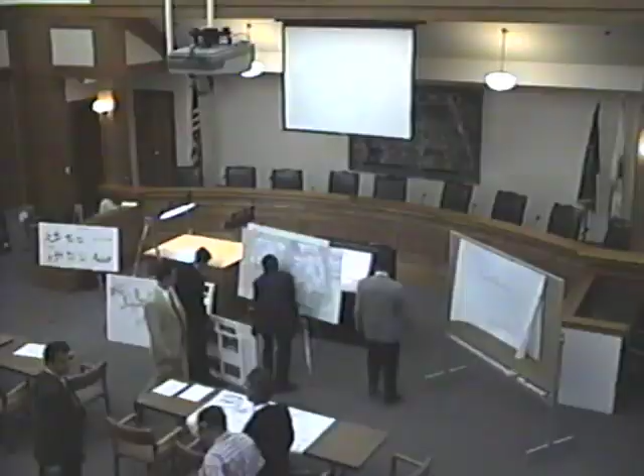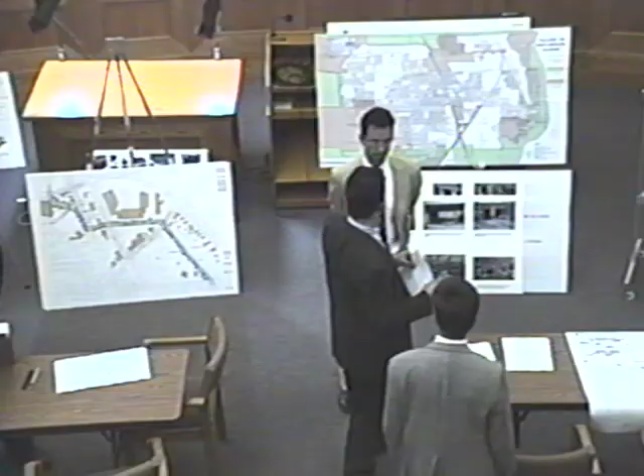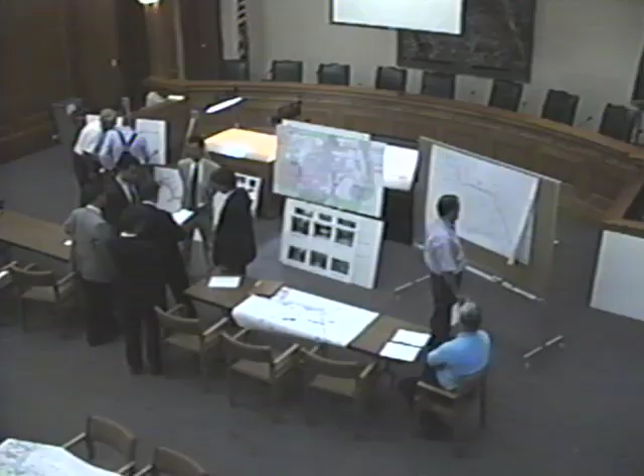Yeah, just send it in anywhere you'd like.

Hi, I'm Jim Reynolds, Director of Public Works. I'm the staff liaison to the Riverwalk Subcommittee, which is a subcommittee of the Central Business Area Task Force. This is our first formal get-together tonight. We've had three Riverwalk meetings that were kind of informal, as they were walkthroughs during the summer to get people acquainted with the potential route of this potential project.

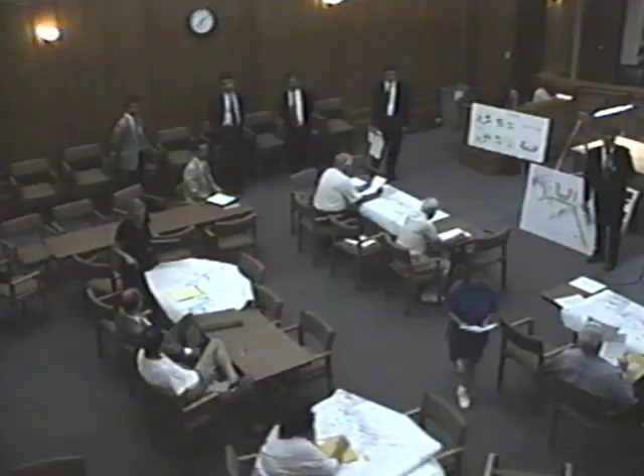So as Jim indicated, we're here in force tonight. And we really want to use this as an interactive process to get your input to the design process. At this point in the study, we're about one third of the way through the overall feasibility study process. This initial schematic design phase is meant to be a preliminary but comprehensive look at the Riverwalk project.

As you'll see in a few moments, we're going to present to you 3 basic concept levels. The minimal level will not have a Riverwalk. It will address primarily the issues of the river itself, being stream bank erosion and channel improvements that are needed regardless of whether any type of Riverwalk project goes forward. And Tony Wolf will address those issues.

Moving up in concept and cost, we will present a minimalist Riverwalk scheme. It will include the basic river improvements but will then add on a basic Riverwalk, and Scott Freres from the Lakota Group will present that information. And then also for your consideration, we have a sort of a maximal scheme, and this is the one that's going to be the most architecturally significant, and will be the most costly of the schemes, but we wanted to get feedback on people's thoughts on that approach as well.

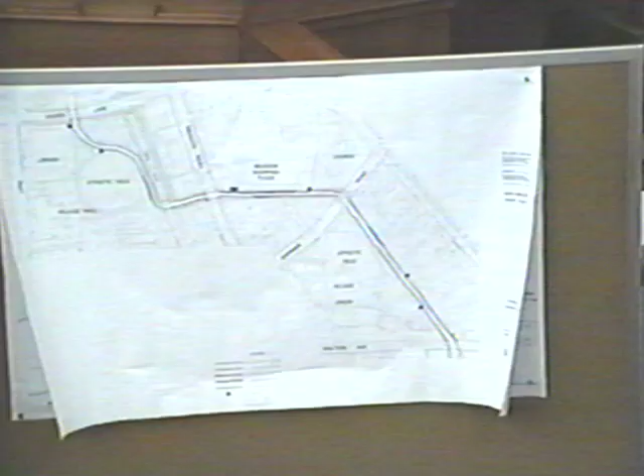Over here is a map showing different heights of erosion, as well as outfall structures, storm sewer outfall structures that are in need of repair. Scott is handing out smaller versions of this map. The difference in erosion heights is important because when we go into developing treatment plans for the shorelines, there are several different methods of treatment that can be used depending on the severity of the erosion and the overall condition.

So what we've done here is tried to color code the severity of the erosion. You can see starting up at the top, if everybody's got their drawings, at the north by Cherry Lane, the erosion up there is not so bad. We've broken it down into 3-foot segments. What we're saying up here is that there's about 0 to 3 feet of erosion depth up there. In reality, there's nothing really less than about 2 feet. This entire stretch of river is fairly eroded.

And as we move down, it gets worse and worse. This blue section is about 4 to 6 feet, and these red sections represent about 7 to 9 feet of erosion. So there's some pretty high levels. If you actually stood down in the bed of the river there, you'd be looking up at how far these banks have eroded.

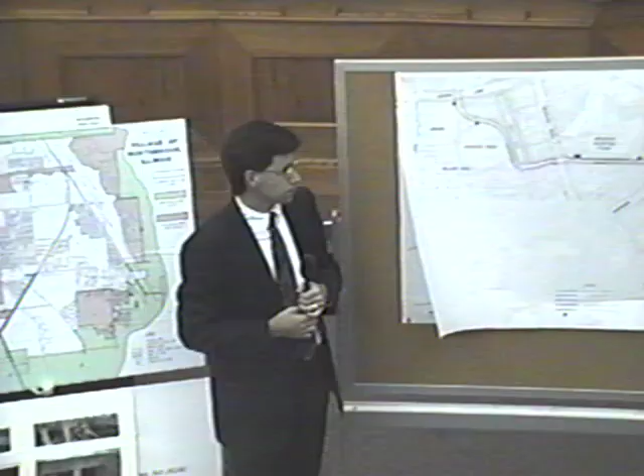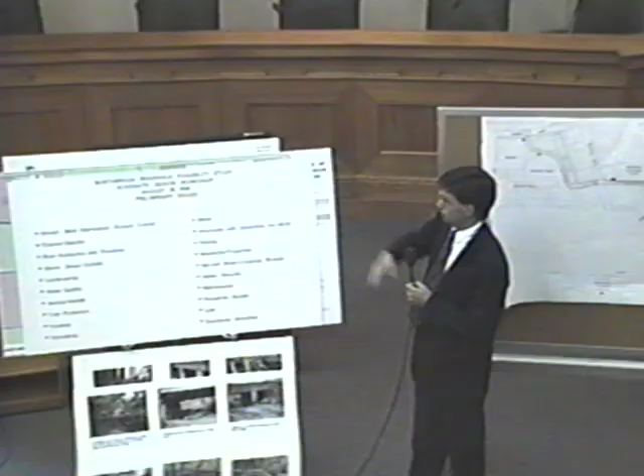There are several issues, of course, besides erosion that we're looking at. We've got this board here I can throw up, and I hope that it will include most of the issues that anyone in this room would be concerned with as far as this project is concerned. You can see we've got stream bank stabilization and erosion control as the #1 issue, because regardless of whether there's a Riverwalk built, we're hoping that something can be done about this. Rather than go through each of these items one by one, I think you'll see that as we move along through the presentation, we'll be touching on each of these items.

And then when we break into our groups, this will be kind of a checklist to see if each of you are satisfied with, or what ideas you may have, on each of these topics.

We have some photos here also to show the conditions that I'm talking about as far as erosion and sediment buildup and debris buildup. I'm not sure if you'll be able to see the captions here, but a few of these pictures are pretty graphic, as far as tree roots just coming out, sticking out of the ground where the soil has been washed away. And of course, these trees are not going to last too much longer that way.

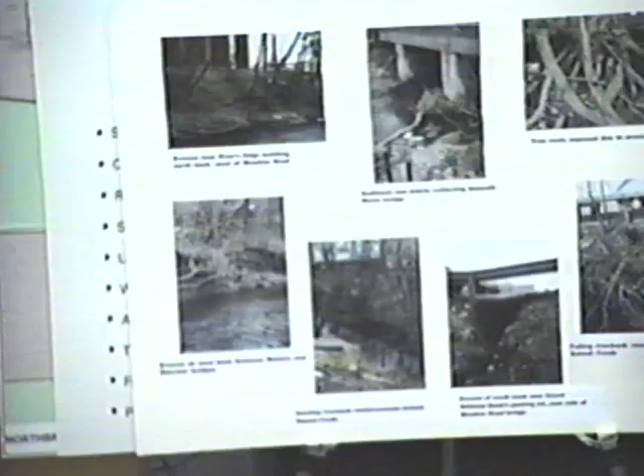There have been some efforts in the past to start controlling this erosion by some wood sheet piling. There's several instances of this failing already, so that needs to be looked at. There's a couple of pretty severe cases of erosion along the parking lots near the bank by Meadow Road, and also behind that Little Louise and that area there.

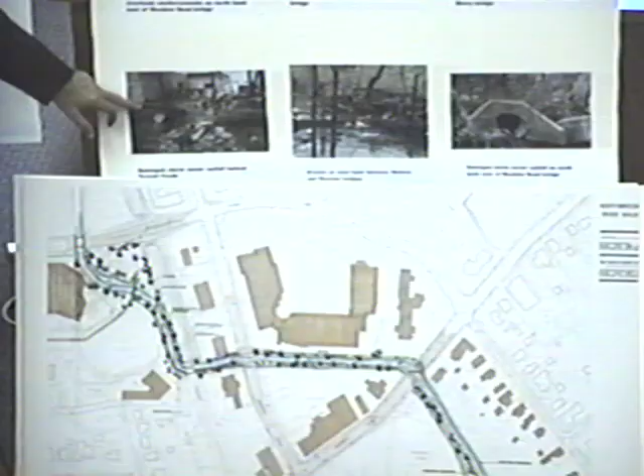Here we've got a couple of pictures of some storm sewer outfalls that have deteriorated quite badly. You can see a couple of them here next to the failing stabilization measures, and another one. These are near the Meadow Road Bridge, and this one here is behind Sunset Foods. There are several of these. These are just a couple of them, but there are, I would say, 8 to 10 of these in this stretch of river that would need to be looked at, repaired, possibly replaced.

So we've got our erosion and our outfall repair. A couple of these pictures are showing sediment buildup underneath the Metra Bridge, or the Shermer Road Bridge.

What we would want to do there is go in and clear those areas out, more for channel stability than anything else. If we can stabilize the shape of the channel here and then go ahead with our shoreline protections, we'll be in much better shape. Also, if we do go ahead with the Riverwalk, most likely we would have to go under the Metra Bridge, which would mean we would definitely need to clear out those areas and get down to a level ground.

So that takes us to our issues board here, as far as river hydraulics and floodway, the main thing there is regarding permitting. We can't really do anything that's going to affect the hydraulics of the river or increase the flood level. So whatever actions we take, if it's going to affect any of that, we have to take some kind of counteraction to bring it back to the state it's in now, as far as the flood level and river hydraulics. The rest of these issues will be touched on as we move along. What I'd like to do next is move along to our actual treatment plan.

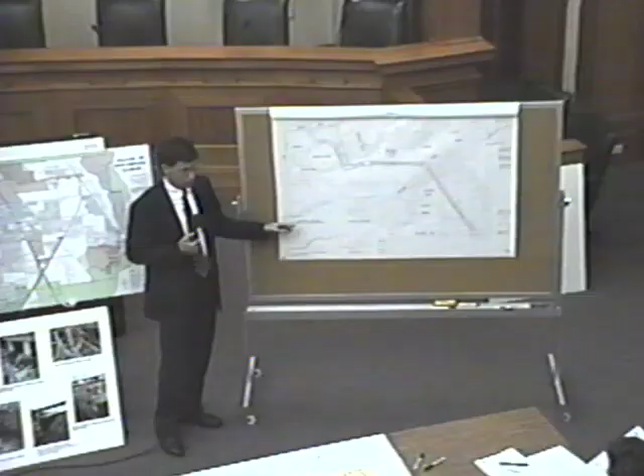So for this stretch up here that we said wasn't so bad, what we're considering is something called an herbaceous vegetation with dark stone and fiber roll treatment. This fiber roll is comprised of coconut fibers tightly wound into a log. This log can be anywhere from 6 to 12 feet long and about a foot in diameter. It's then laid right at about the normal water level, and you want it generally to be about two-thirds submerged in the water.

What will happen is as this becomes saturated with water, it becomes very heavy and acts as a support or a block to keep the ground from eroding away. Within that log are some plantings of either willow plantings or herbaceous plantings that will, over time, grow, and the roots will grow down into the ground. After about 5 to 7 years or so, this fiber roll itself will biodegrade away to nothing.

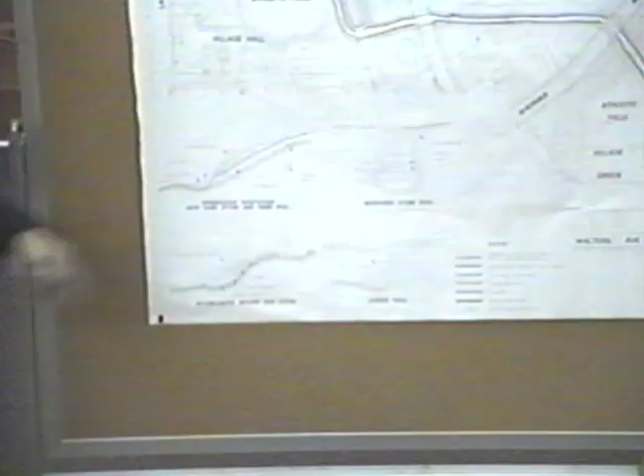But what you'll be left with is this vegetation that has taken hold and has tied up the soil, and you'll have this herbaceous vegetation also up the rest of the slope, some type of grass or ragweed or something like that. Down at the bottom, underneath the fiber roll, you just have some dark stones to keep the roll in place until it really takes hold.

We say dark stones just because we want this to be as less intrusive as possible. We don't want it to look like there's really been a ton of work done here. We want it to look as natural as it can be so that it's an appealing thing for people to see.

As we move down towards the Metra tracks, maybe some of you have seen there's a very steep slope on the side of the tracks with mostly dead vegetation in there. Most likely this is due to some chemicals that Metra uses to keep the vegetation off the tracks, and sometimes it will run down the hillside.

So what we've proposed here, where the erosion is a little bit worse and the slope is fairly steep, is something called interplanted boulder and stone. It's a little more sturdy and secure than the herbaceous vegetation with fiber roll, and what it consists of are some large boulders down at the bottom with some plantings intermingled, where the roots will take hold and tie up the soil.

And then just a few stones above the boulders, and along here we would just try and replace the dead vegetation that's there with some new herbaceous grass and some nice looking vegetation to look at, if the Riverwalk is ever actually developed.

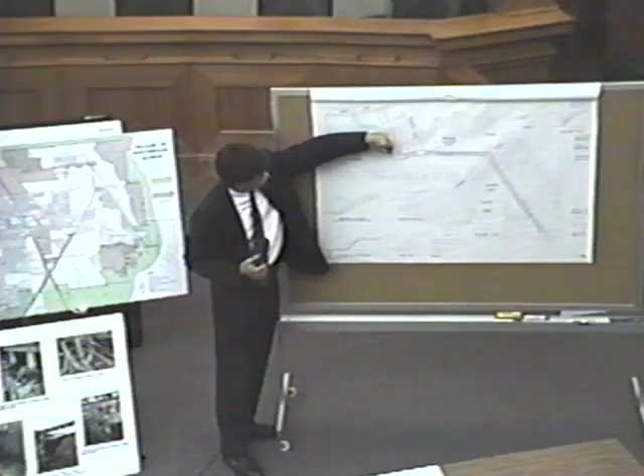So they're very sturdy. On the opposite side, what we're proposing here is a stone wall. The idea here is that if we do go ahead with the Riverwalk, it possibly would come under the Metra Bridge on this side, and then we would want some kind of a wall there to protect the walk from water, to keep it away as the people are going through.

And the stone wall is kind of a nicer thing for people to look at as they're walking, and also keeps the water away.

As we come under the Metra Bridge and move on to Meadow Road, again we're looking at the interplanted boulder and stone, and then in this next section after Meadow Road, we come to a little more severe erosion, where we have to start introducing some sheet piling.

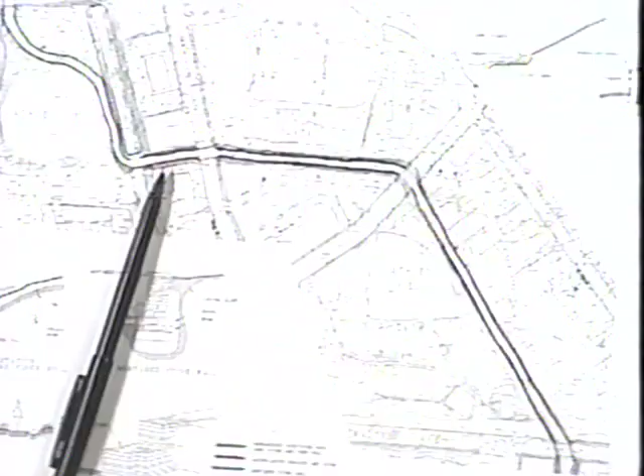Possibly, what we're looking at right now is something - it's a vinyl sheet piling, if possible. It's a little more attractive than steel sheet piling. You can get it in different colors. It's very strong still, and you can cover it with some different types of things to make it look fairly as natural as possible. That's the brown section here.

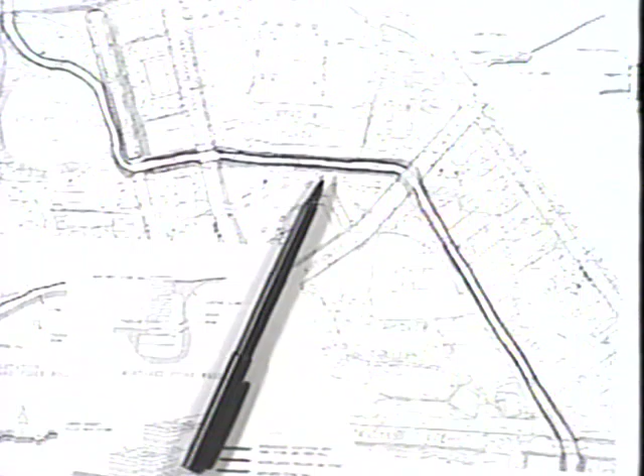The purple sections are just using cobblestones down at the foot of the bank - basically it serves the same purpose as the cobbles here with the fiber roll, but we're not introducing any vegetation here with the idea that, again, if we go ahead with a Riverwalk, this may be more of an urban type development with the shopping plaza here and the shopping area over here.

Scott, when he talks about his Riverwalk developments, will go through the possible different themes - maybe a natural theme here, an urban theme here, and a natural theme there. Any questions here?

At the end, once we get into the recap.

Okay, so we've got the cobbles and the sheet piling here. And over here, again, we go back to the interplanted boulder and stone as much as possible. That's kind of the strongest vegetative treatment that we can think of to use. So we want to use that as much as possible and avoid the sheet piling and avoid the stone walls and the gabion walls. So that's what we're using all along here, along the backyards of the residences.

On this side, however, the erosion is quite severe, and we've gone with the sheet piling with the idea, too, that the Riverwalk would possibly be going along this side and could then just be right at the top of the sheet piling.

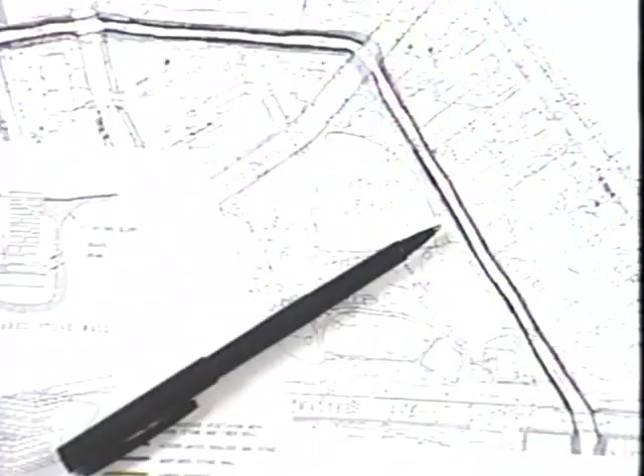So that's the idea for treatments, and I think at this point it's probably time to move on to Scott Ferris, who will tell you about the two Riverwalk alternatives.

Thanks, Tony. Before I get started with the alternatives, I want to quickly go through our analysis of how we really viewed the river. This is a little bit different than Tony's analysis.

Obviously, there's erosion control, and that's a major part of this process. But to get to the river walk part of this process, which is much more the aesthetic pedestrian environment as opposed to the functional resolve of erosion issues, we took a pass through this whole space and tried to define each of the areas or reaches of the river as to what its character was. That'll help us define, whether we go with a minimum scheme, maximum scheme, or no scheme at all, what kind of treatments or image each part of the river should have.

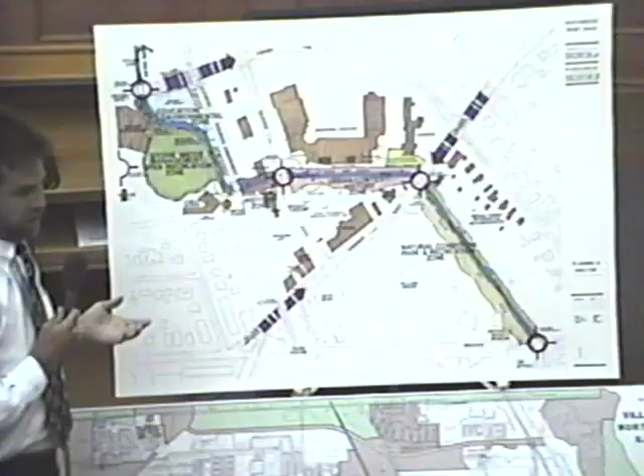Obviously, it's a linked river walk. It's going to all be connected. But as you go through different portions of this river, there's clearly a different feel to the river, and that should be accentuated rather than fought against in designing the river walk system.

First and most important, the river runs through this town, but nobody knows it when they're coming through, driving by, or walking by, because you can't see it. It's below you, you drive over it. The only reason you know there's a river there is because you go over a bridge, but even the bridges themselves are pretty heavy and hard, and you really don't notice the water below them. Very few have open railings that look down at the river.

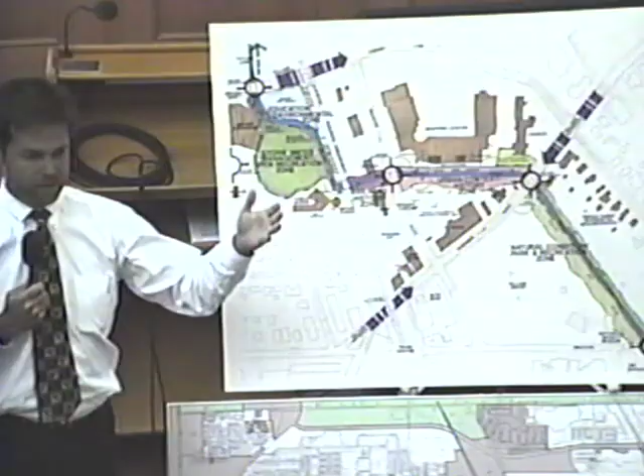One of the very first things we noticed was important, in terms of the overall length of this river walk, was establishing gateways - gateway opportunities, areas where you could get to the river, areas that are signed or identified to get down to the river, or merely elements like special lighting, special features, a plaque or a banner or whatever, that identifies: the river is here, this is where you get on the river walk, or this is just a place to look out over the river and overlook.

We've identified those up at what we call a village arterial, Cherry, that brings a lot of traffic into the downtown. Again, at the other village arterial, which we defined as Shermer Road, that brings everybody into downtown. A crossing or gateway opportunity along Meadow, a much lower density road - although there's a lot of traffic on it, its scale is probably bigger than what it needs to be for the amount of traffic actually moving through it.

And again, another gateway opportunity at the very southeasternmost end of the site, down by the doctor's office, St. Norbert's, and the museum. Another gateway opportunity at the end of the park. These are critical points - something should happen at these areas in one shape or another to identify the points to get to the river or to see the river.

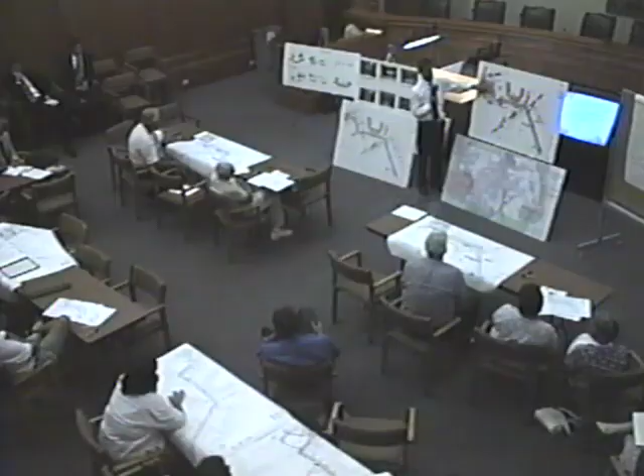Then walking through this space, we started up at the opportunity - assume that you get on this at the parking for the library. We have the new library expansion over here that really lends itself to establishing some sort of what we call the educational or environmental zone of the river. There's already some treatments planned as part of the library expansion, as part of the parking lot and the shoreline of those areas.

We saw that as an opportunity to identify maybe reading gardens. We saw this as more of a passive zone, much more naturalistic in whatever approach we take there, whether it's a river walk, stream bank erosion treatments as Tony talked about, or just the overall quality. This doesn't need to be a hard edge.

As you move further to the south, you're walking towards the public works facility, towards the water tower, and you're almost to the Metra Bridge. This is obviously the stormwater detention area, the open ball fields - again, a much more naturalistic character.

It has another opportunity as it leads back to the Village Hall for a gateway right on axis of the little walkway that's right out here between the library and the Village Hall. A nice little axis that will take you right to a point and get you into the system, so to speak, of a river walk, which is part of this detention area and the ball field.

We have, as we're walking along, some concern areas.

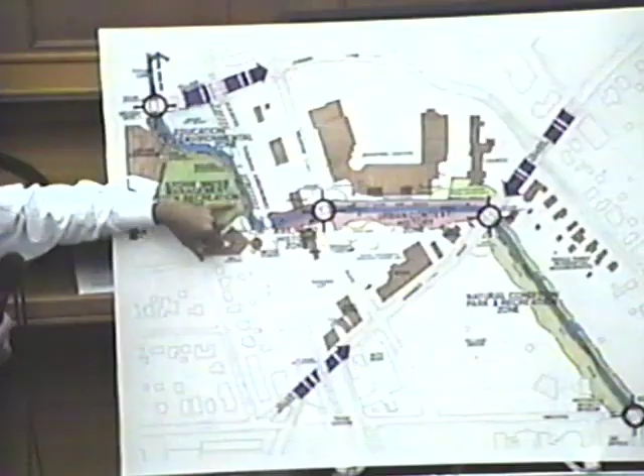One of the issues is this defoliated embankment along the train tracks. It's unsightly, but it also has some severe erosion. That's an issue we need to take care of.

As you turn the corner moving toward the Metra tracks, you've got a bit of a view shed problem looking back toward public works and the water tower. Not much can be done about the buildings themselves, but there could be screening opportunities through landscaping to deter the view away from those facilities and toward the river itself.

Going under the Metra, walking through the scenario of how I'd traverse this space, we get to the railroad history zone we're defining, and we start to get into a much more urban edge riverfront. Moving further in behind the retail core of downtown, we get into a more urban context history zone as well.

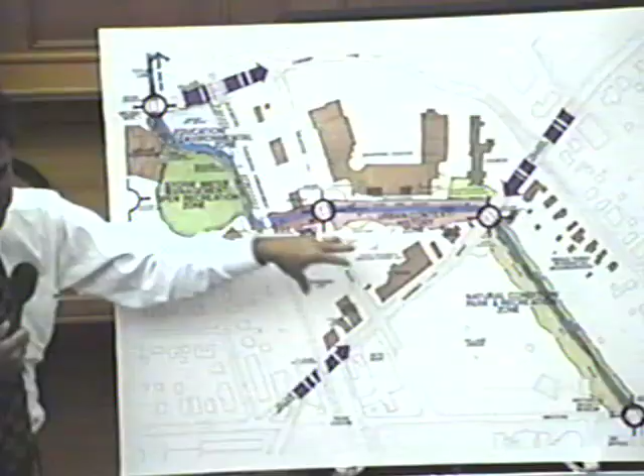Both of these zones we've thought of as much more hard-edged, areas where the erosion is severe enough that we're going to need strong treatments like retaining walls, or the gabion walls Tony talked about. These are areas where we can do neat things with streetscape, incorporating what's already been done downtown but also into this Riverwalk area, drawing people in, making this a feature of downtown rather than just the backs of stores and loading docks, and really making this the centerpiece everyone sees when identifying the Riverwalk in Northbrook.

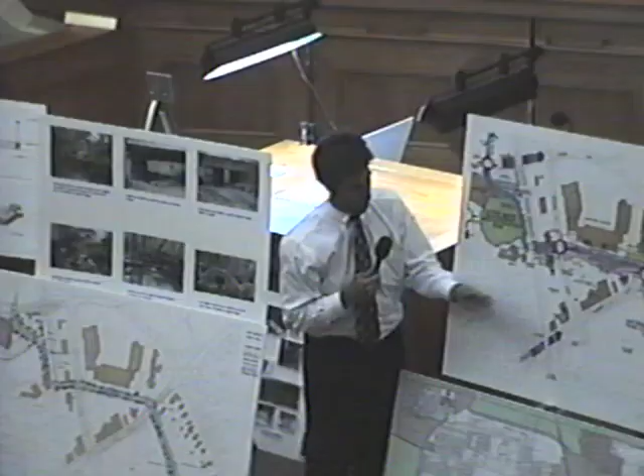Going down a bit further, you get behind the doctor's offices. We've got a lot of issues back here, some poor views, some screening needed from the backs of the shopping centers, and one being this parking lot area, which is a critical component of the retail—we understand that.

We got the sense from numerous visits and a bit of feedback—parking's always a big issue in any downtown situation—that part of this parking area, as much as it's used, really feels underutilized, not being used to its potential. Maybe it's an issue of striping, alignment, circulation, parking islands, what have you. But this back corner really feels like a no man's land, depressed, kind of caving in with the river, and it's really an opportunity as opposed to a liability.

Moving eastward, again poor views, a lot of noise back here as trucks turn around to load into Sunset Foods. But right at the end, through the brush and debris, if you get a view back in there and do a little clearing on the opposite side, there's a nice view opportunity into what we've defined as the cloister garden area of the Presbyterian Church—a nice little garden space. We don't want to bring people into it, but it would be nice to get a view and utilize it as a vantage point off this corner.

Again, a gateway opportunity as we go by this bridge. Right now we can go under that bridge, but we can't go under the bridge on Meadow Lane—there's not enough head clearance, and not enough bank erosion allowance. That means we'll have to come back up and cross the street at this point.

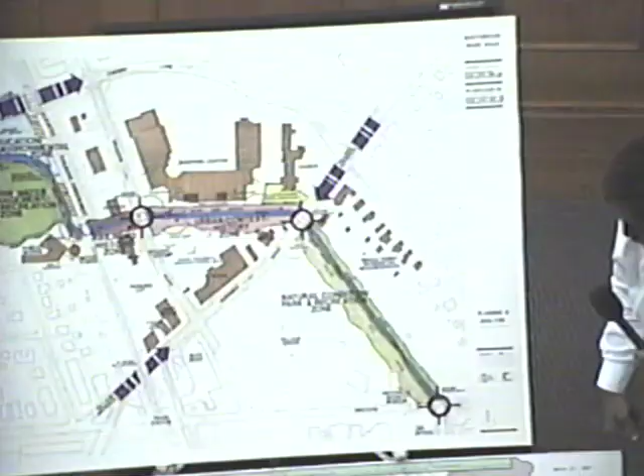But this is the Historical Museum. It's a good place to have on a river walk. Many communities don't have that when they're establishing it.

We've got some anchors that are already on this. We've got the library, the cultural context. We've got the History Museum on the south end, the Historical Society. We've got all these little retail components, a church, the village green - all these elements. We just don't have the link yet. So we've got all the elements you need in terms of infrastructure and land uses around it, but we don't have the link.

Going through this area, the other concern here is the natural condition, the park and recreation zone. That's kind of an obvious. It should be left in a naturalized condition. It should have a meandering path of some sort through that space.

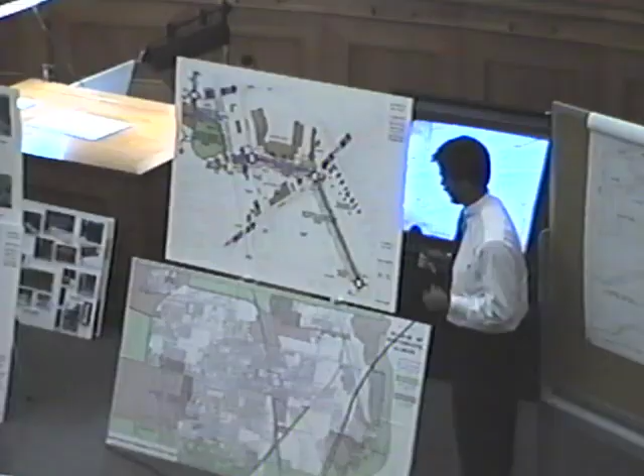We really also would like to incorporate or foster the idea that on the other side of the bank there's some sort of green park-like atmosphere, because there is erosion on both sides, on the private property owner side as well as the side adjacent to the park. Both should be treated and addressed the same way, whether naturalized or with natural solutions to erosion. Those are things we like to see happen in terms of that space.

Getting into the minimum, maximum schemes. The minimum scheme - I'm just going to paraphrase this - all of these schemes have the erosion control issues that Tony mentioned in one shape or another.

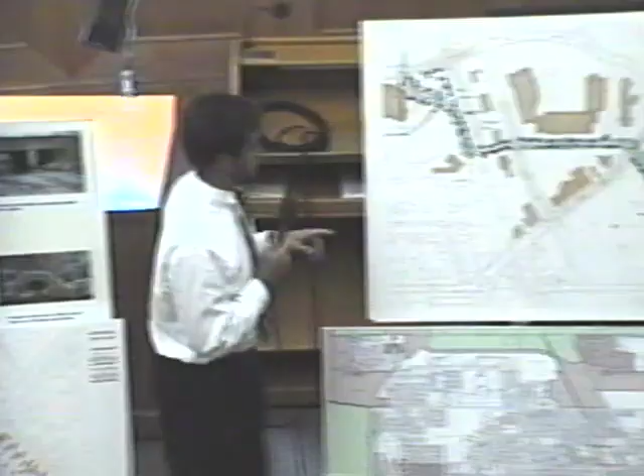Those are necessary evils that have to occur because of the conditions of the bank and the river itself, not because we absolutely have to have any one of those in any of these areas to make a river walk work. But I will say that in some instances, additional retaining, additional structural components need to be integrated in order to make a river walk work.

And those may be in the form of a retaining wall, a boardwalk or a raised platform, a bridge crossing the river, an asphalt pathway or a brick pathway - we have a number of different options. But they would be required in order to make this river walk work, not because we have to contain the bank, but because we have to contain the walk.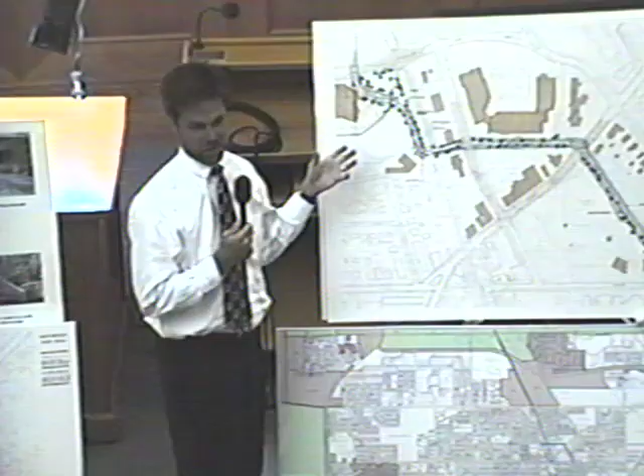The walk can't just run on a slope. It has to be level. In order to make it level along some of these bank spaces, we need to create retaining walls and or structures. And that was why I paraphrased that we saw an urban context and a naturalistic context, because as we create these structures, they need to work within that context.

We can't put in a solid concrete wall behind the library and expect that to look naturalistic and educational in intent. We can put something like that behind the parking lot here, where we're really trying to create a river walk with the promenade and the lights and banners flowing down the sidewalk.

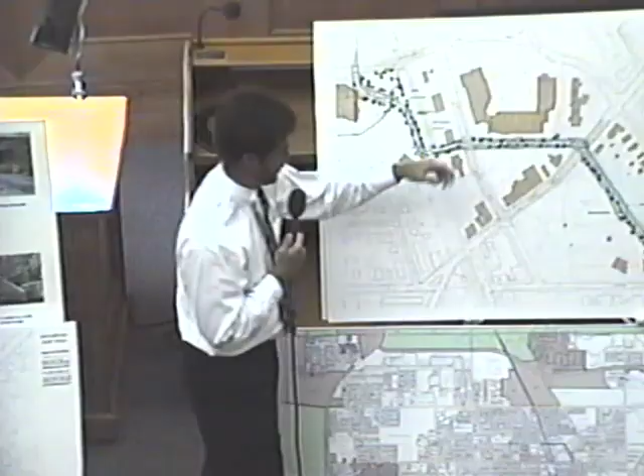The minimum scheme, starting off of the library, really using that as the catalyst for this, the connections here. We've got a path that comes off of Cherry Lane. And I should note that these paths we're showing here are very simplistic.

They are a paved path. We're looking at, in most instances in the minimum scheme, asphalt connections, boardwalk connections, a synthetic wood or recycled wood product instead of real wood, so it can look like a boardwalk but last forever instead of replacing it. We're also looking at opportunities for special paving, decorative pavers, bricks, reflecting on the history of the village as a brick-making community, incorporated in special areas, overlooks, seating pockets, landings, but only in those areas in this minimal scheme.

Asphalt walk, a little path coming off the parking lot, a bridge connection or footbridge connection - something we have to get people across the river from the parking lot to the library.

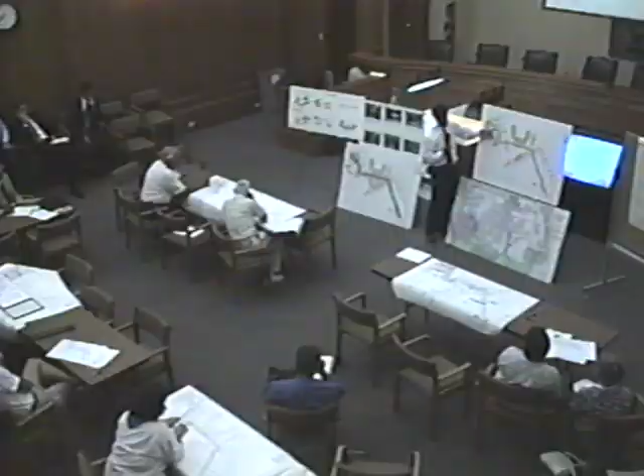It's an expense in the minimum scheme, but it was the expense at this one location we thought was necessary to get people back the connection between the village hall, the library, the cultural institutions, and along this ridge or high point over here of the berm before it dips down into the ball field.

We also saw a little connection riding along the edge of the river on its west bank along here, and that just kind of runs along the length. It's a relatively even, low grade. There's really no great slopes in this space, so you can just run that path along there.

We've got little water rapid features, or riffle structures, that are really just large stones or limestones placed in the water to create movement when the water is at certain levels, so there's some interest in these spaces. We've shown plantings here, minimal plantings, to accommodate aesthetics and naturalistic groupings of plants and some sort of natural feature.

We're not going to the maximum scheme, which we'll talk about in a minute, to make this look like an urban oasis. This is just landscaping to accentuate some of these areas, to fill in the blank spots, to refoliate the Metro embankment — something we have to work out with Metro, since they're the ones who clear-cut all the stuff in the first place. But we need to add some landscaping here, from a minimal standpoint.

We get to a point immediately adjacent to going underneath the Metro tracks, just downslope of the Public Works and water tower facility, and we're still on the lower bank. We have a little retaining wall structure that has to keep us above the high water mark along this area. On the back side of that retaining structure is a little boardwalk that wraps around and takes you underneath what would be the south side of the Metro tracks.

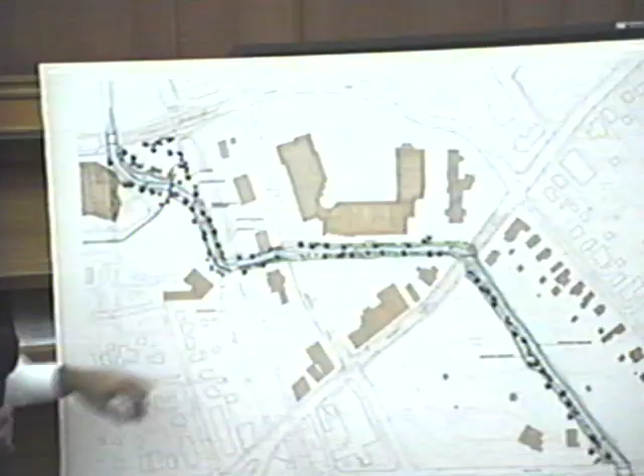In this particular instance, we've done as little impact to the existing parking lot as possible. There are areas along the outer edge where we've encroached 3, 4, 5 feet into the space. We may lose 1 or 2 car spots along this area, but that's what's absolutely necessary just to get the bare minimum of a path along there.

This means we're still up at the high edge of the bank, not going down to the bottom yet. We're still running along here, and in this area it's just a simple asphalt path with a little overlook at the midpoint, maybe some decorative pavers, continuing down. At this point we start going down the slope because we have no space to work with behind the bank or behind the doctor's offices over there. The drive comes in, there's diagonal parking right up against this whole space, and there's literally no space up at the top curb to keep the walk.

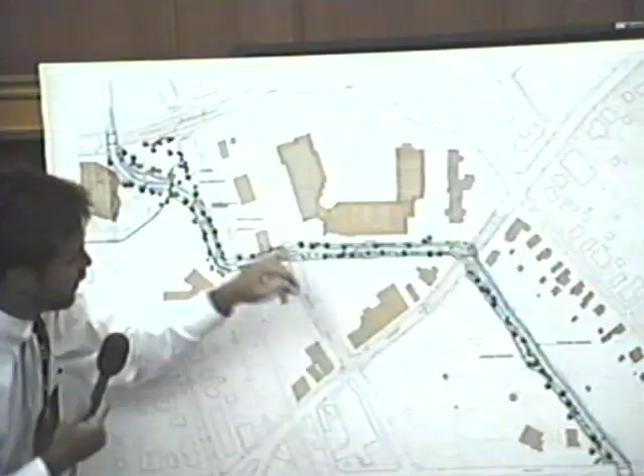So we're going to start coming down, slowly go underneath Shermer Road. At this particular area there are no overlooks. There's all the erosion control treatments we talked about, still there. The opposite side is a strong wall feature, probably some sort of vinyl sheet piling, but it would be revegetated, just not to any great extent, meaning natural gardens and prairie plantings along that space. There'd be new tree plantings and some mid-story plantings to replicate greenery along that backside. In all schemes we've identified some sort of solid screening, like a fence at the top of that slope, to really screen off the back of the service doors to the retail.

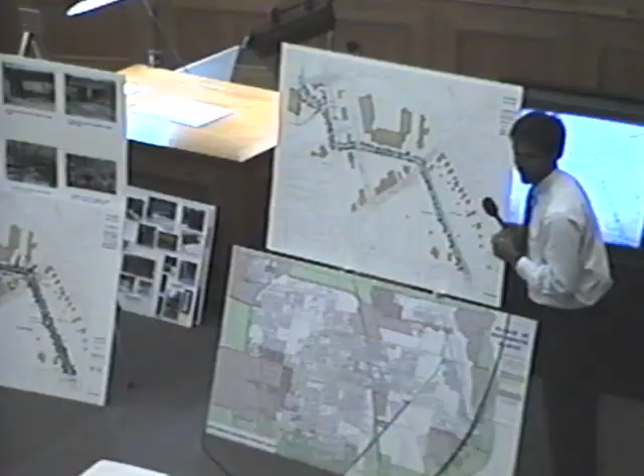We connect up to the existing path system that's out there, with minimal interruption to what's actually occurring and minimal expense in putting in a whole new stretch of walkway in that area. There are new plantings as part of the retrofitting of some of the retaining and erosion control, some infill plantings, a couple of little overlook areas, and maybe a couple of rock outcroppings along there just to create a naturalistic sense in the space.

Then it's just a continuation of that path up into the end when you get to Walters on the far south end. So this is a walk, purely meant to be just a place that you can walk, see the river, walk along the river, and stop. There are none of the bells and whistles of a San Antonio Riverwalk in this scheme.

The next scheme gets into the bigger vision, or the dream plan. When we do these, we try to put everything in that we can think of, regardless of cost impacts, only because we'd rather throw the ideas out and get them out on the table. You can always go backwards and think of ways to do them cost effectively, but just to get the ideas out there and really think through what the vision should be if we really had the open checkbook, so to speak, to do this.

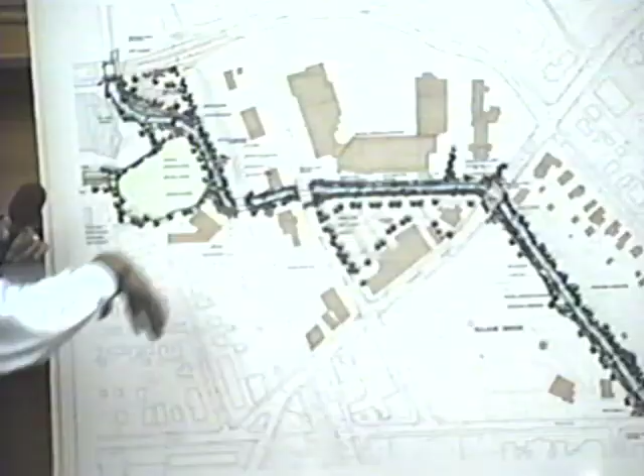You've got the metro track kind of blocking your view there, but you also have a lot more landscaping behind this little overlook that really creates the feeling that you're not looking at the water tower behind you or the back of the garage that's adjacent here, with all that exposed paved surfaces where the trucks come in and get serviced.

We've also taken that whole slope — I don't know how many of you realize it's there — and it really needs to be cleaned up. There is a solution to clean it up as part of our erosion plan, and that's nice, cost effective, and an engineered way to do it.

But we thought, hey, this is a really neat area. Some major rock outcropping, and maybe we create a water aeration feature or a water movement feature where we bring water down that slope across all the rocks to create noise. You're sitting on a water wall going down to the water. We've got to retain it and fix it anyhow, but we can just keep recirculating water in that area and really make a feature — hear the noise, see the rapids coming off and down the river.

At that point you cross the river, cross the bridge, and you're on a little boardwalk. It's retained — the boardwalk is higher than the high water mark you're walking on. You come underneath on what was the good side of the river, the easy side to cross over — that's the north side. You immediately come to a little flat point, and then cross back over again on another bridge. So we've got two bridges here and one bridge here.

Already you can see that just to get to these more maximum schemes, you're adding more of these features. But they're features nonetheless, and they're nice features that create the feeling of walking through a really riverwalk space.

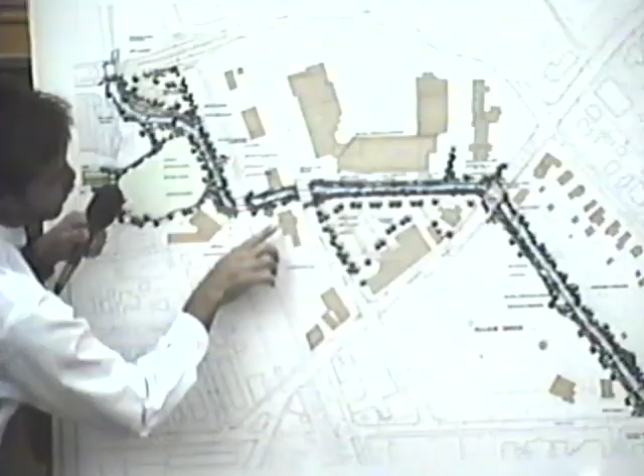We've dipped the river in, brought the river a little bit into the site because we reorganized this space. We actually go down to the river on another level so that people are there walking up along the drive. Here, there's also a level down below that as well.

You walk along a little bit further, a little overlook, a little riffle structure, a little further, you go down. One path, the brick paver path, stays up, hits at the corner, nice brick pavers crossing Shermer Avenue. The other one is a boardwalk that goes down to the water and goes underneath the bridge at that particular area.

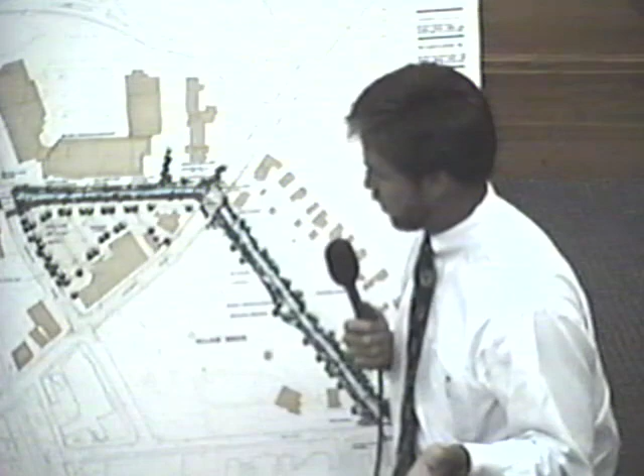So, big splash, big dollars in the center. This is where the Riverwalk gets an image, and people will remember this space when they think about the Riverwalk from Northbrook. In this particular scheme, from the parking standpoint, we've lost 15 cars, picked up 6 additional cars, for a net loss of 9.

But we've looked at the opportunity of actually narrowing down Meadow a little bit to create little bump outs and parallel parking areas instead of diagonal parking off of Meadow, which is an opportunity in itself, but a traffic concern in terms of backing cars into moving traffic.

We've actually indented into that space all along this edge right here and provided for some parallel parking spaces along there that could really benefit this retail development on the east side.

The point being that there's all kinds of scrub material in there, a really wide setback in that zone, and a sidewalk in there. Well, move the sidewalk over, and you've got a lot of extra room to actually indent cars and get them out of the line of traffic so you can keep your actual traffic movement the same.

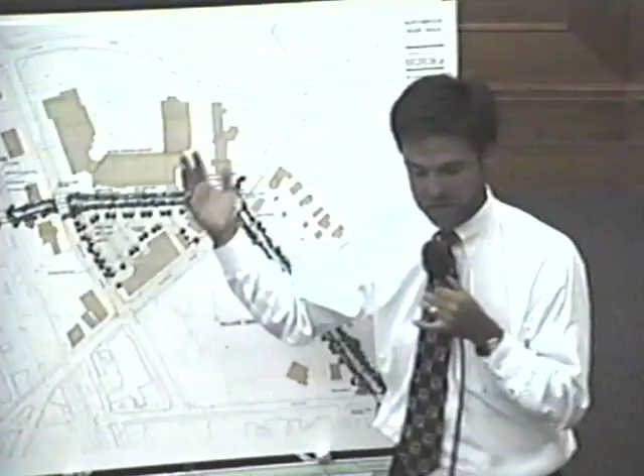But we've got a nice, clean, straight Riverwalk. The lights marching down the thing, the banners flying. You come over here, and you've got the decorative bridge structures with the lights on, the plaques on them again.

You come underneath the bridge, you're on the boardwalk still at this point, and that boardwalk comes back up and meets the asphalt path right about here, about 200 or 300 feet south of Shermer.

Along here, we've shown some vegetation, some reorganization, some plantings on the opposite side of the bank as well as on the park side of the bank.

We come a little bit further south, again, the pedestrian lights coming down the river, little bench seating that looks out over the river along this area, but much more naturalistic, much more utilizing what's out there.

I think in some instances we tried to widen the path to 10 feet in that area and really push the idea that this is where you can begin bike trail connection to this Riverwalk, then continue the bike trail on out towards the Meadow Hill area through local streets that would be marked as such.

But really, again, we've got the archway down at the south end, we've got the decorative bridge features, and this is really where the Riverwalk stops, kind of at the historical museum.

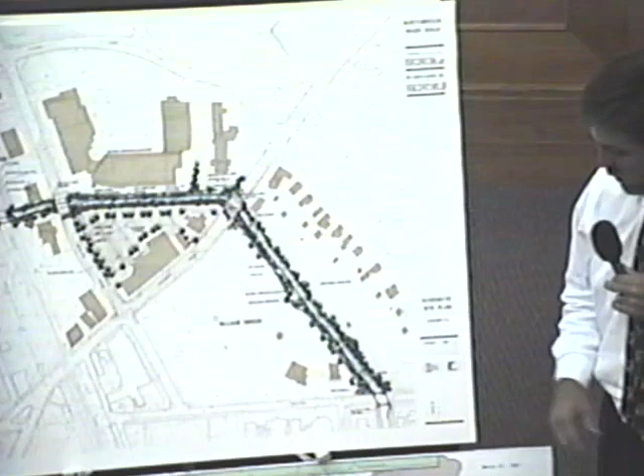There's a lot of question as to how you reroute people and get them back onto the system or back through the system. One option is to really sign this area and use the kiosk system we've developed along the rest of the Riverwalk to tell people to get towards Meadow Hill or to the Aqua Park or back onto the trail at some other point.

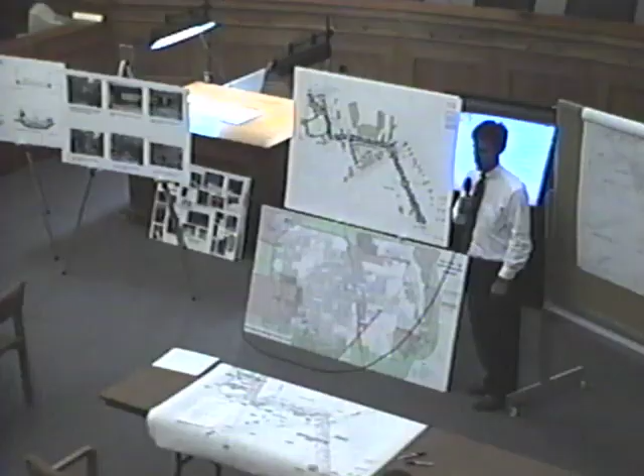But it's real tough once you get past the south end to keep that momentum going that we've got on the north side because there's no space at that point. I'll really quickly go back to the church.

In this particular area, whether you're up at the top or on the lower part of this path, we've done a lot of clearing on the opposite side, the church side, but we've put a decorative metal fence, or wrought iron as people tend to call it, along the church side, much more in context with the church's image, opening up all the views from our Riverwalk into that cloister garden space that's back there.

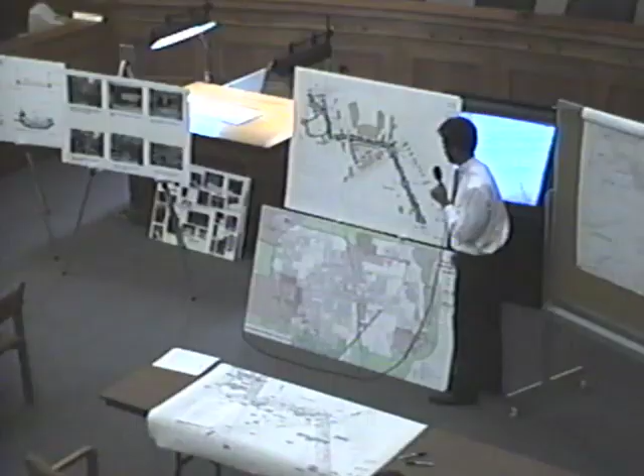Obviously, something that has to be worked out with the church, but it could really be a benefit to everybody that there's something nice back in this space. And it really de-emphasizes the fact that you've got this shopping center backing up to the Riverwalk at that point.

David's bringing up right now some of our little sketches, and these again are just rough ideas. They're not meant to be solutions or final things, but they're meant to give suggestions to some of the ideas that we talked about, the idea of some of these cross sections.

This is cross section A right here. This is cross section B in this area. C, cross section C right here, back of the shopping center. Everybody can see it. This is where the trucks are loading. Our screening wall, real steep embankment to some of our structural... thank you, the architect in the crowd has the pointer.

We've got the sheet piling wall here on this opposite side. This may be a gabion wall. This may be rock outcroppings, steep replanted slope, some new canopy trees. On this side would be the screening wall, and this would be the loading area on the opposite side.

As you go across the river, as I was talking about, here's that lower boardwalk area. You're almost down by the river, off of the water 2 or 3 feet in this particular area. Then we got a lot of stone outcropping. We may have some structural walls in particular areas, but you get back up to the upper Riverwalk.

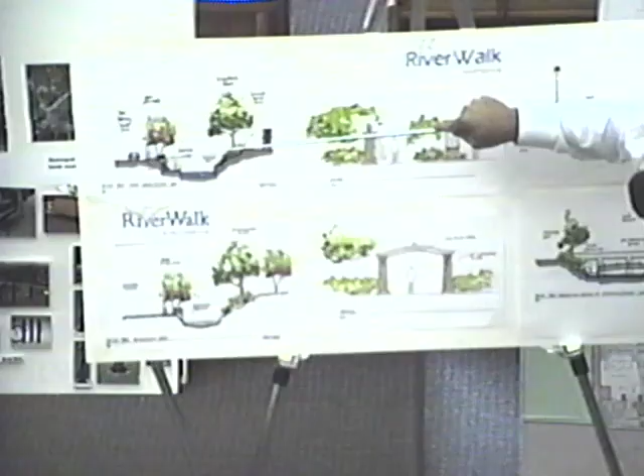That's that paved one with the promenade and the lights, and this would be that drive aisle that indicates the parking area that's immediately adjacent to it. So you can see there's a lot of stuff going on, a real short corridor of space, but this is really kind of where all the energy happens, right in this particular zone.

This particular scheme right here is... let's see, oh that was C, that was A. Okay, A is up looking north towards the reading garden area.

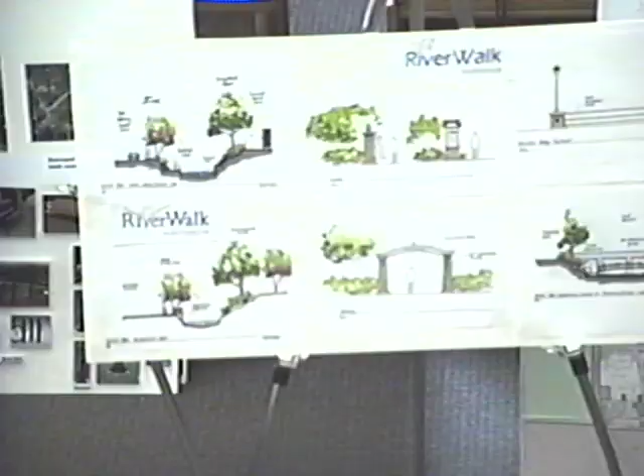This would be the Metro side of the bank. This would be the replanted bank side. The Metro tracks would be up here, coming down to the bank, and this would be the little boardwalk area. Again, some lighting, a little overlook as you're looking up, looking north off the Riverwalk across this bridge area right here, and then on the opposite side, typical little bridge crossing. There's that Metro bridge in the back side.

Then you've got to traverse over the bridge, get to the opposite side of the bank, and at this point, this is where you start coming all the way back up again to Meadow Lane on that side. So we're trying to make reaches, meaning this portion to here, this portion to here, and then there are others, and then this portion all along the top here that are handicap accessible.

There's clearly going to be some areas where you can't get with handicap access—those are the ones that go down to the river, especially on this opposite side over here. But we're trying to make instances where you can do each of the stretches of river in a wheelchair and not have to kind of go back on yourself to get to another one and get in a car to get to another point on the Riverwalk.

We'll get more into that as we get further along.

Ideas: a little kiosk, a little land and stone pier with a decorative light column and some sort of signage board, maybe a real simplified rooftop structure with a stone base and some sort of placard in it for a kiosk or a gateway. Here's typical railings that are out there.

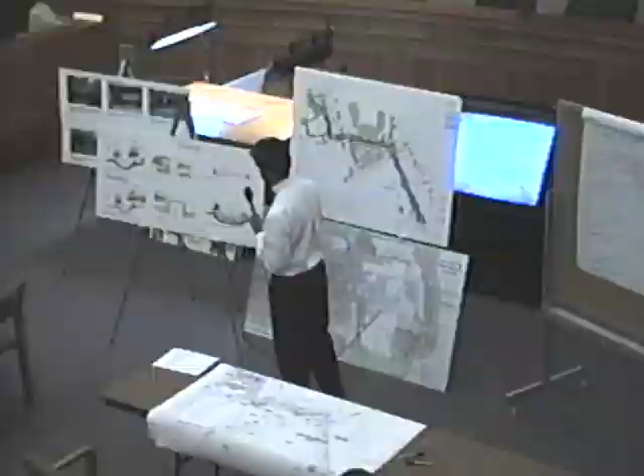Maybe we paint them aqua color, or we paint them red, or we paint them some color that's part of the Riverwalk, so every time you see the bridge railing, it's painted the same color. Here's the piers. Maybe we do a little routing into them to get some relief, and then we put a cast plaque, whether it's a metal plaque, a painted plaque, whatever, it says Riverwalk on it.

And we've got some little graphics here that just show ideas of how we can create some sort of identity or marketing campaign for Riverwalk.

Maybe there's a cast steel beam arch, laser cutout letters that say Riverwalk, and this is the portal that you walk through at all of these gateway opportunities that we talked about along the river. So these are just examples of ideas.

We've also got, and we'll lay them out later during discussion, ideas of different materials, different palettes of streetscape elements. Those are all part of the Riverwalk. None of these are our idea - they're just meant to be examples. There's 10,000 different lights we could use downtown. There are existing elements already in the downtown that we should work with, like stone materials and some planting materials. Those are things we can build off of, but there are new elements we can introduce to make the Riverwalk zone different, especially the lighting, which could be a key element, and the decorative pavers, whether brick, cobbles, or whatever works with the rest of the downtown area.

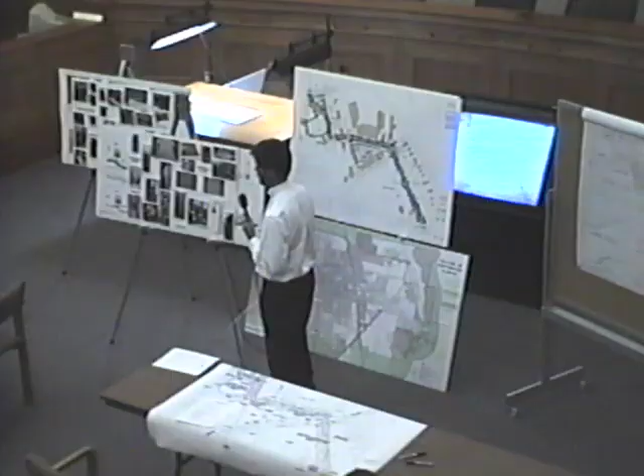Leave it for Nick to talk about the damage report.

The definition of rank having its privilege means the project manager gets to talk about the costs. What we've summarized here are the three basic concepts, and we've itemized the various cost items. You're all moving your eyes to the bottom lines, so I'll take you there to begin with. Just to do the stream bank improvements, the erosion control measures, and the channel improvements that Tony described, we're estimating at this very preliminary level approximately $2.25 million for the half-mile reach of the river from Cherry Lane down to Walters. Bear in mind that's treatments on both banks, so we're actually talking about a mile of stream bank improvement for that figure - on average about $400 per lineal foot of stream bank for the basic river improvements in this reach.

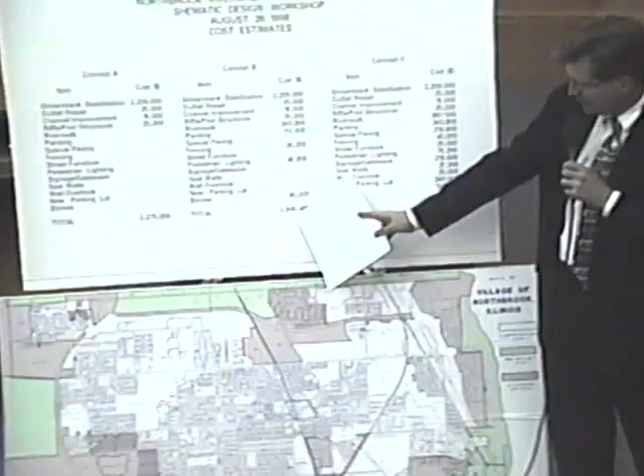Overlaid on top of that are the two schemes Scott described. The Riverwalk premium for the bare bones scheme adds about another $500,000 onto that basic river channel improvement cost, bringing it to about $2.9 million for the channel improvements, erosion control, and the bare bones basic Riverwalk. Then concept C, the visionary scheme, we're estimating, again very preliminary at the conceptual schematic design level, something on the order of $4.5 million, roughly double the cost of just the basic river improvements. So we feel these three schemes have bracketed from what's necessary at the minimal level to what's possible at the maximum level, with reasonable cost figures for the various improvements described.

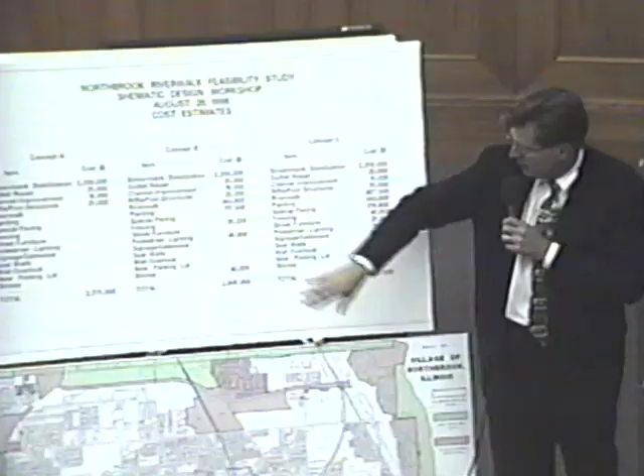Just to take you through the intermediate concept: the stream bank stabilization and channel improvements, as mentioned, is on the order of $2.25 million. The Riverwalk itself, the pathway, is about $350,000. Plantings to go along with that are about another $100,000. Decorative fencing and stonework run roughly $75,000 to $80,000, and about $50,000 for very basic, almost minimal safety lighting.

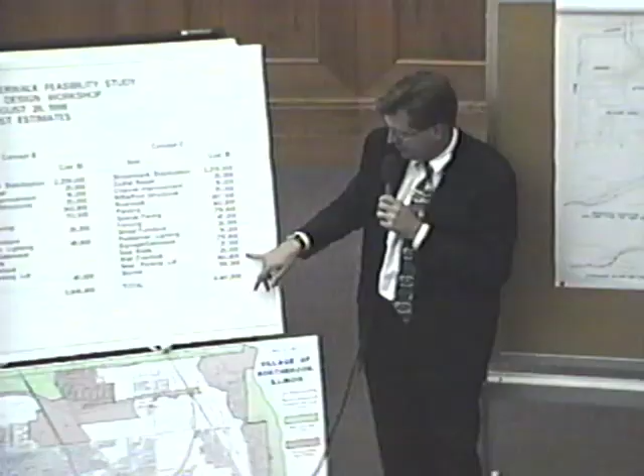To get to the maximum scheme, we put in a much more extensive and expensive Riverwalk - roughly double the cost of the basic walkway itself. This includes various bridge elements and treatments to get down to the river, some additional specially paved areas like bump outs up by the library, street furniture, more extensive fencing and lighting, and gateway structures. We've also estimated parking lot improvements at about $350,000 for the reconfiguration of the parking that Scott described. That's what's included in the most extensive scheme, bringing it up to about $4.5 million.

We've talked for much too long - I apologize for going over our time here. We really do want to go to the workshop portion now and get your input and ideas on these different concepts. John, could you just explain to folks how this is going to work?

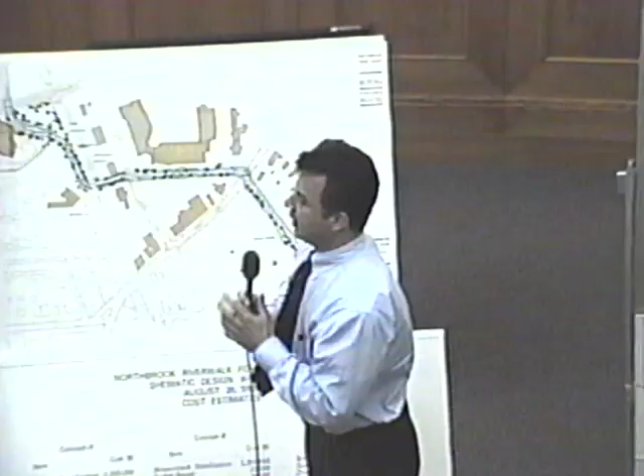Okay, great, we'll do a quick wrap up here and then take a stretch break. I want to do a couple quick things so you can get organized during the break. This is really what we're talking about. We've got the issues list going around - we want you to first think about issues. Did we get the issues that you have? Did we miss something? Did we not explain something? This is the same thing you're getting handed out now - all the different pieces and problems we're finding, things that are physical, environmental, infrastructure, as well as aesthetic, safety and security. We put at the end the downtown amenities question: do we feel that the river is an amenity for downtown?

If it is, then what should we do to make that amenity work for the downtown? Everybody's going to have the issues list. We first want to talk about that, and then go into the plans. And we got them all in order now.

This magically all appeared. This is Plan A: what do we do to just fix up the river and make it work right now as a river system? Then Plan B, dress it up a little bit with Riverwalk. And Plan C, go to the visionary plan, as Scott said, to do the overlooks, the signage, and the Riverwalk. Okay, so think of the basics on through the whole system.

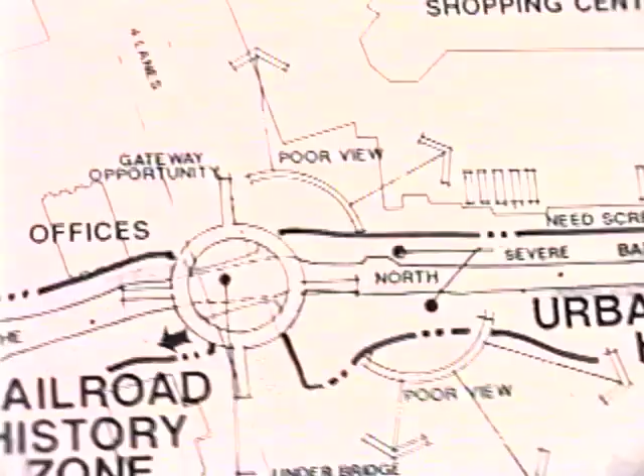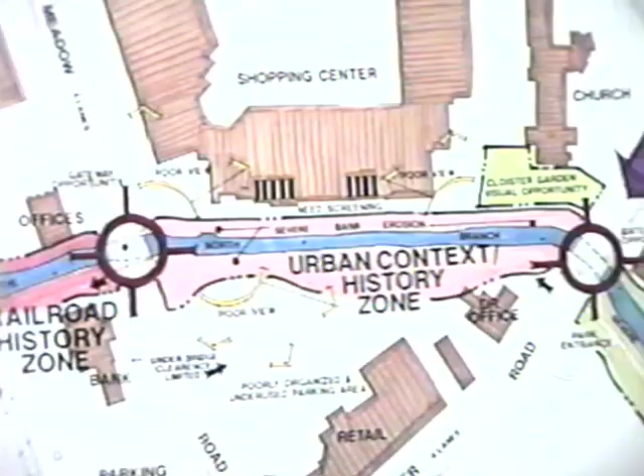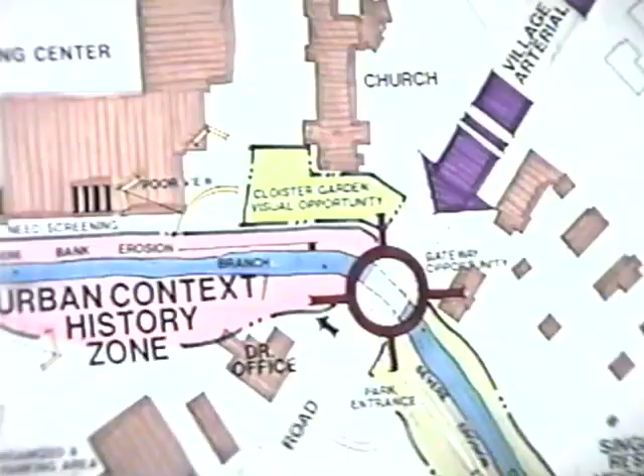So it's like Canadian Pacific. Canadian CP. Right, but they pay us to run. So is that metro that we're doing? Gonna possibly put the fiber optic cable right along the tracks all the way north. If we start, getting the ball rolling, then I guess it's a matter of doing it yet. I wouldn't, it's probably never too early to start writing some letters. I think, can we get a permit to go underneath the thing? Right, I mean, that's the kind of thing we were talking about.